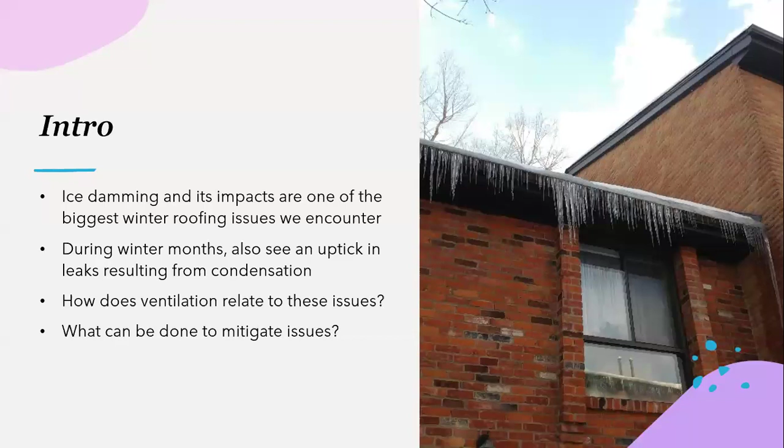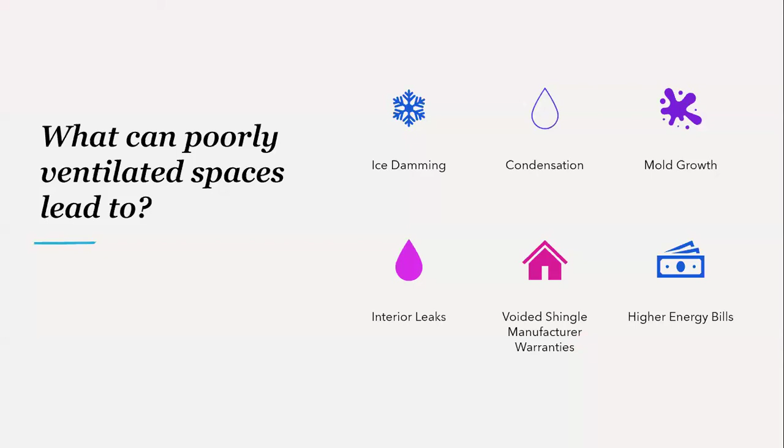So when it comes to ventilation, what can poorly ventilated spaces lead to? Well, as the title suggests, ice damming and condensation can be attributed to inadequate ventilation. Through these two issues, you can also see mold growth occurring, interior leaks, voided shingle manufacturer warranties, and higher energy bills for residents.

So especially with sloped roofs, whether there's shingles or another roof system in place, the attic is really important when it comes to ventilation and issues like ice damming and condensation. So especially in our climate, attics aren't accessed very often, or at least with people that we talk to. So I can see how they can kind of be out of sight, out of mind, but they do serve a very important purpose.

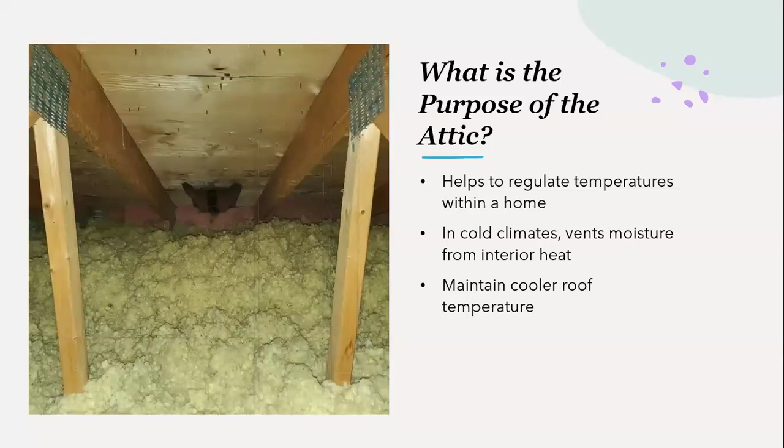Some of the key aspects of the attic do include helping to regulate temperatures within the home, keeping the conditioned space conditioned. Also, in our climate, again, with the cold winter months, it helps to vent interior warm, moist air out of the home and out of the roof surface. Also, it helps to maintain cooler roof temperatures.

So looking at what a normal, well-functioning attic should look like, a few key elements. Number one, you want to have a vapor barrier and insulation evenly distributed throughout the space to, again, keep any interior heat inside the occupied parts of the home.

As far as ventilation goes, you want to have at the lower end of the roof surface intake vents or soffits to allow cool air to come into the attic and then move through and out through the top surface, or the air outtake vents. So again, low venting for air intake and then vents on the upper and the high slope for air outtake. Neither of these vents should be connected to anything. It's strictly for airflow.

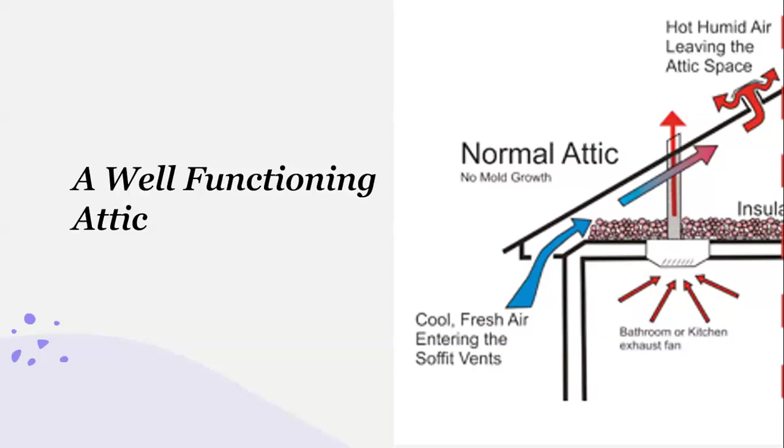Also, venting that's very important would be any interior connections to bathrooms, kitchen fans, laundry rooms. Any exhaust venting should be going up straight through the roof surface and venting outside of the home. So throughout the presentation, we are going to be taking a look at actual real-life examples in different attic spaces of when things are not functioning as intended and how that can lead to various issues.

But first, what do these attics have to do with ice damming, and what is ice damming? So ice damming is snow that melts and refreezes along the edge of the roof surface. And when it does this, it creates a dam, which then traps water behind it. Oftentimes with ice damming, we also see the presence of long icicles hanging from the gutters. So does this mean that anytime there's snowfall, there's an opportunity for ice damming to happen? Not necessarily. In just a second, we'll take a look at what the exact recipe for ice damming is.

But in the meantime, we're going to take a look at our first poll. So have you experienced ice damming this season? We'll leave this poll up for a few moments if you want to respond. Yeah, so this season, whether it's the beginning of this year or end of 2023, but in this winter season. Okay, if we want to share those results with everyone. We're just going to end the poll now.

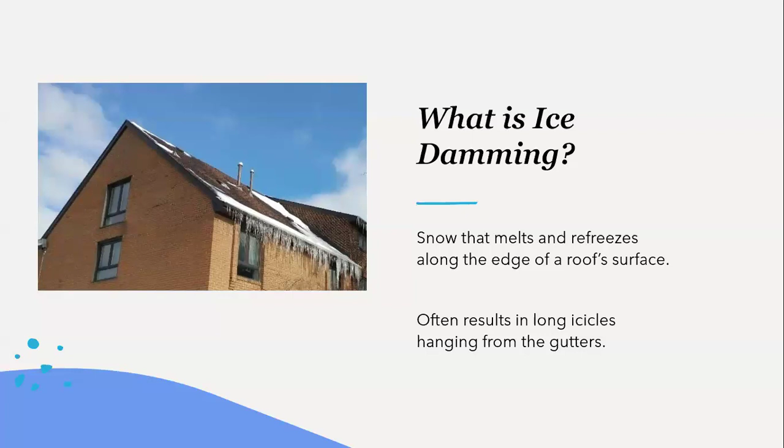Okay, so have you experienced ice damming this season? We have 19% saying yes, and 78% of respondents saying no. 3% are unsure. Okay, so not surprising that a lot of people have not seen any ice damming this year. I know we have people attending today from all over Ontario. So depending on what region you're in, you might have experienced more snowfall than other regions.

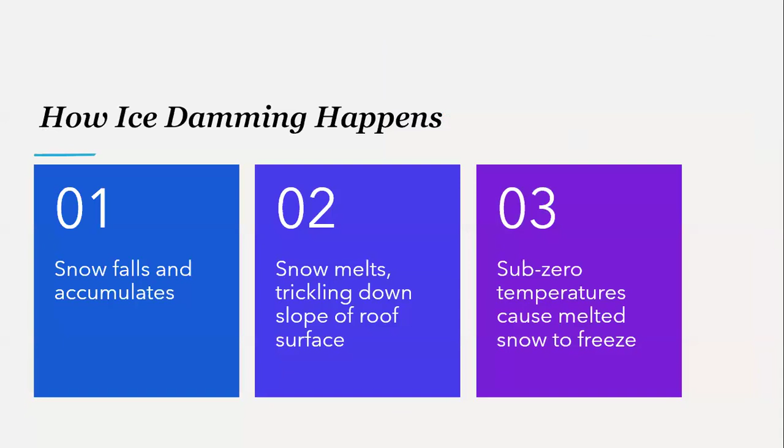So related to the second part here, the snow melting, this is commonly attributed to heat loss within the home and deficiencies within the attic. So if there are deficiencies in the attic making the space too warm, and again, going back to what some of those purposes of the attic space are, including regulating the roof temperatures. If it's too warm and you have the heat rising to the top surface, then the snow melts along the edge, freezing along the bottom if there are sub-zero temperatures following the snow accumulation.

This lower edge of the roof surface, where the soffits are and where the gutter system is, these areas aren't receiving any heat from the interior space, which is why that is where it would tend to have the ice buildup and potential for icicles.

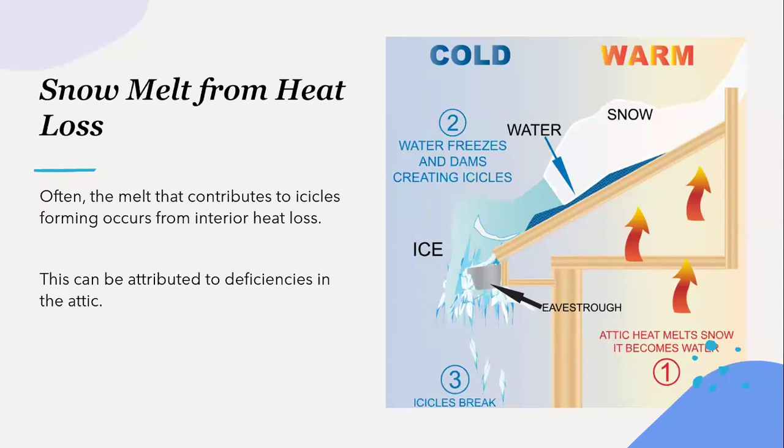So if ice damming is occurring, what's the harm in it? First and foremost, I think especially for managers, board members, residents, if you are experiencing ice damming, the first thought is, of course, going to be the possibility of icicles or large chunks of ice falling from the building. For the people that are living with this, it does pose a huge threat, and then liability for management or boards if something is not done about it. As far as the actual roof system or the gutters, it can cause damages to each of those areas as well. And on the next slide, we will look at an example of that. But there's also potential for things like mold growth or interior leaks related to ice damming.

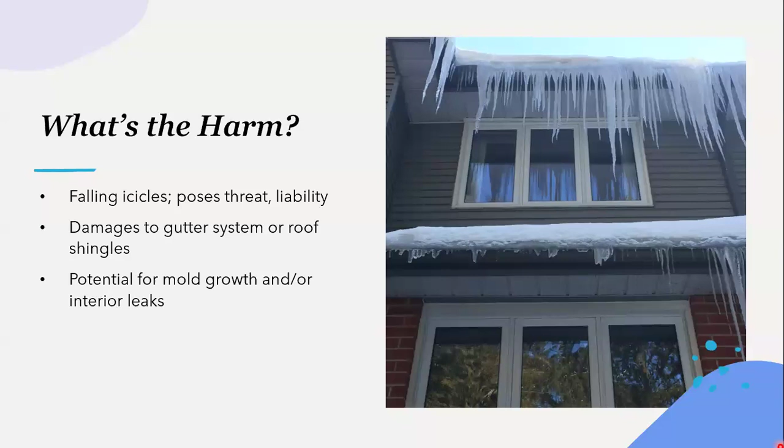So some of the common issues that we see, again, if there are large chunks of ice or icicles built up along the gutter system, there is potential for the actual gutters themselves to become detached or damaged because of the weight. Another thing that we see very often are damages to the lower shingles at the roof's edge, whether it's from the ice causing damages to the top surface, or something we see more often is the water backing up under the bottom layer of shingles, like it did in this example here.

So these two photos are from the same roof surface. And as you can see here, this was a newly replaced roof. If you were just taking a look at it, it looked to be in great condition, didn't seem to be any problems with it. However, when the ice damming was occurring, it was backing up at the bottom edge there and causing an interior leak.

Something to keep in mind, especially with new roof installations, is that you should always be getting 2 warranties. So the first warranty would be from the installing contractor that's going to cover any issues with installation or workmanship. The second warranty would be from the actual shingle manufacturer in the case that there are any defects with the actual materials and products used.

In a case like this, every shingle manufacturer warranty that I have ever read, and I've gone through a lot of them, explicitly states that any defects caused by ice damming or ventilation issues are not covered by the warranty. So just something to keep in mind.

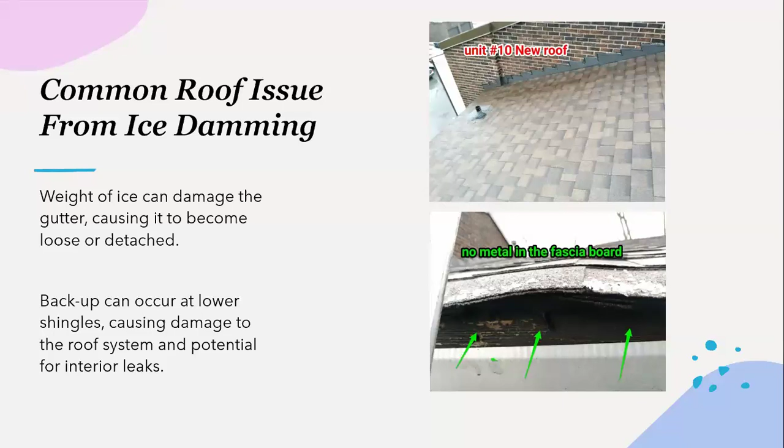That's all right. So no, absence of ice damming does not necessarily mean that your attic is well functioning and free of issues. You're still going to want to identify the root cause of your attic issues. Yeah, so as we pointed out a second ago, there are some issues that come to mind right away when ice damming is occurring or when you're thinking of ice damming. But it is important to keep in mind that, especially because attics are spaces that are not regularly accessed, there can be problems like mold growth or even wood rot that can affect the structural integrity of the roof surface that can be occurring whether or not you do see ice damming.

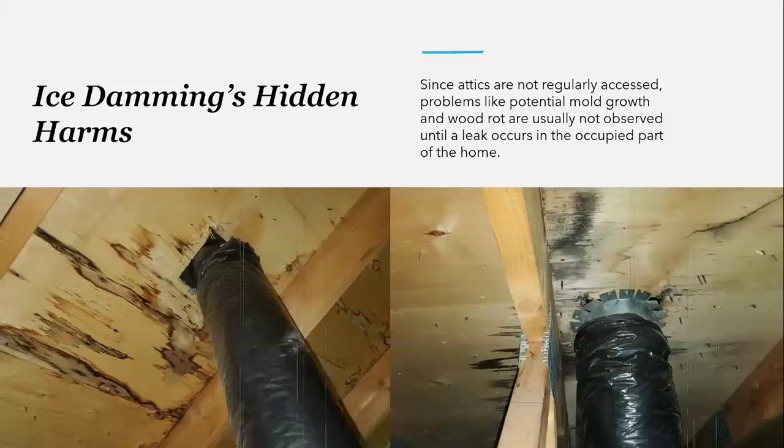For this reason, if you do have ice damming occurring, we understand the importance of having the icicles removed and removing any hazards that may be in place. But it's also important to identify the root of the issue, which we often say would start with an attic inspection and identifying any deficiencies in the attic space.

I think we have our final poll here also. Okay, perfect. Sorry, one sec. There we go. Sorry about that. So what steps should you take if you are experiencing ice damming? Okay, great. Thank you all for your participation. I see a couple more answers coming in, so I'll just give one sec. Okay, I'm going to end the poll now.

And I'll share those. So what steps should you take if you're experiencing ice damming? 1% says leave it, it will melt soon. 25% of you say remove the ice, and 89% investigate the cause. And in this case, we did do multiple choice because we do understand the importance of investigating the issue, but also wanting to have the ice removed so that it's not going to pose any threats.

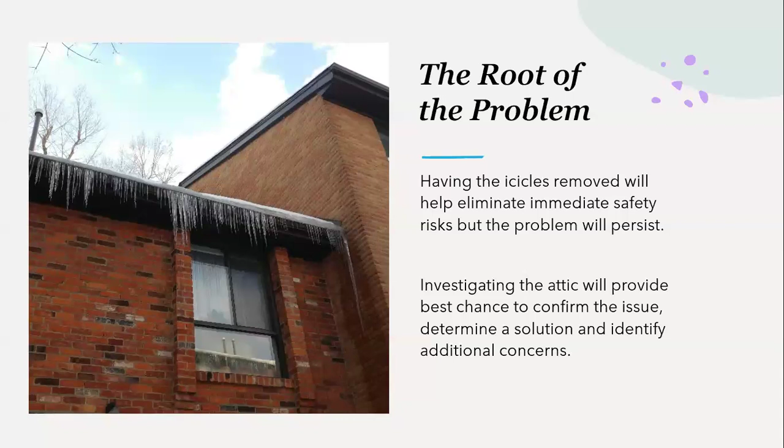So when it comes to identifying the root cause, again, we do recommend investigating the attic, and there is a long list of things to investigate just to make sure that all of the different elements of the attic are working together to promote adequate airflow and that everything is in place and functioning well. So as you can see, there's a long list of things to identify here, and we're going to be going through examples of each of them.

Michelle, what would you say of the list of things to identify in the attic would be the most important thing to look at? I wouldn't say one of them is more important than the other. I think they're all equally important. The attic is a very complicated space, and it's almost like its own ecosystem that balances off each other. So all of those elements are needed in order for it to function properly. You need the proper amount of air intake, proper amount of air outtake. You need vapor barriers to protect and seal. Every single one of those is very important, because if one of those is off, then the ecosystem will not work.

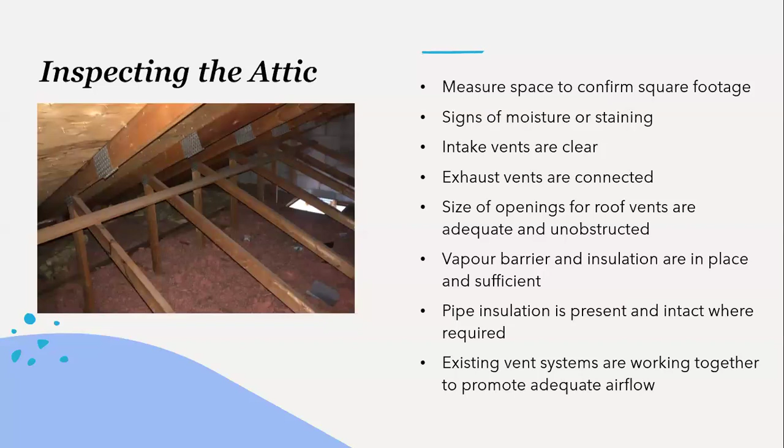One of the things that I'd say we see most commonly is that the insulation, especially if it's blown-in insulation, is blown right to the edge of the roof surface, blocking the soffits and the amount of air that's getting in. From time to time, we also have seen this where there are perforated soffits in place, but if you remove that soffit and look behind, there's plywood in place. Or we've seen situations where the style of soffit isn't perforated all the way through, so it's just not allowing enough of that cool air to enter the attic and displace any hot, warm air that's in place there.

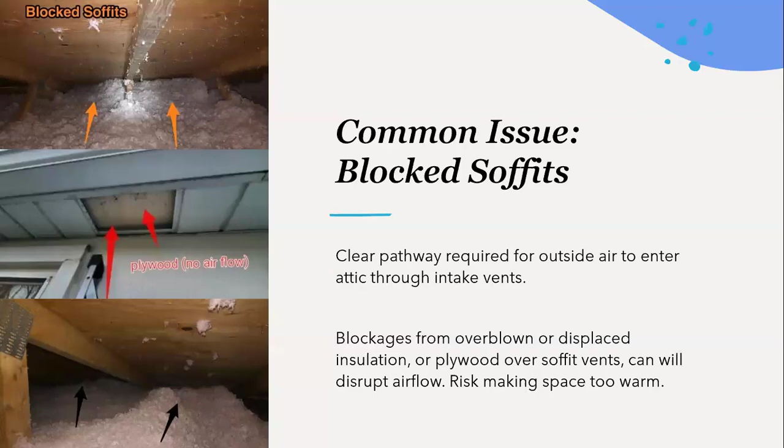This is likely the most common issue that we see in attics, and we see it in a lot of different ways. And that would be specific issues with the exhaust vent connections. So again, these exhaust vents are connected to places like bathrooms, kitchens, laundry rooms, areas where you want to have the fans on so that you're not creating any condensation from a hot shower or cooking or anything like that. So you don't want that built up inside a bathroom or a kitchen. You also don't want it built up in the attic.

So if we have issues with these vent connections, then what we see is that hot, moist air just pumping straight into the attic space. So again, we see it in a lot of different ways. Some of the things we see most commonly are situations like this where it's become detached for whatever reason. We see cases where it just wasn't installed properly in the first place. So in a case like this, it's not good enough to be close to the roof surface. It has to be properly connected and venting out through the top of the roof. Otherwise, you're going to get air leakage into the attic space.

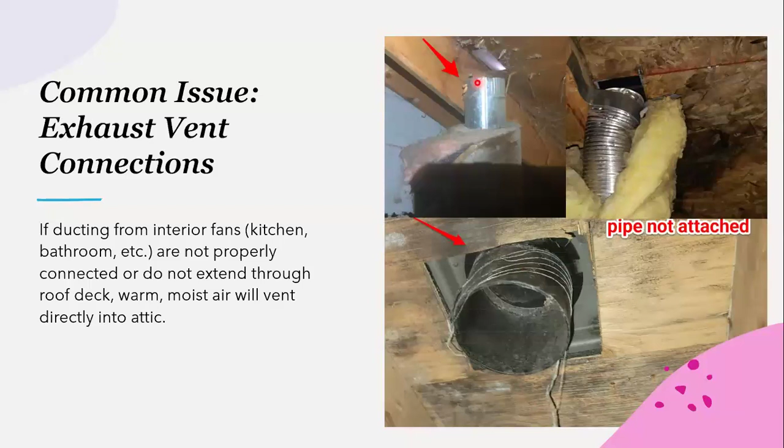Similar issue with the exhaust vents. Again, if they're not connected properly, that could be because they're not connected to compatible roof vents on the roof surface. For the air outtake vents especially, there are a few different types of vents. However, with the exhaust vents, it does have an interior connection to make sure that it is adequately sealed and you're not getting any of that air leakage. With any type of air outtake vent, it doesn't have that connection. So it's going to be like you see here, where even though it is right up to the plywood roof deck, there is area for air to escape and pump into the attic.

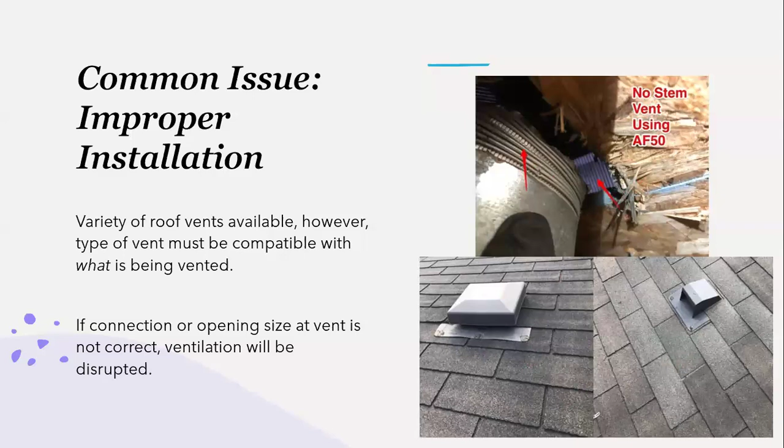This is something that we don't see very often, but we have seen before, and it's just too crazy not to include. So in this case, there was an active exhaust vent that was connected to the roof surface, but not connected to any sort of vent, and there was just plastic right over top of it. And then there was an opening nearby that was not in use. So again, that hot air didn't have an area to escape out of the top of the roof surface. You can see there's quite excessive staining happening through there. Some other issues in this attic as well due to improper installation.

When it comes to the air outtake vents, as we were just looking at, again, you want to make sure that they aren't connected to anything. Their purpose is just to make sure that there's space for any hot air in the attic to move out the top of the roof surface. The minimum requirement is that there should be 1 square foot of outtake ventilation per 300 square feet of attic space.

It's also very important, not only do you want to make sure that this isn't connected to anything like an exhaust vent, but you want to make sure that they are unobstructed and clear from anything, including roof joists. So in these cases here, it may not seem like a big deal because it's not covering it completely. But even in these cases where you have something blocking that space, it is impacting how much air can get out of that opening. So any areas where there is a joist in place or any other roofing element that may be obstructing it, you want to make sure that it is clear.

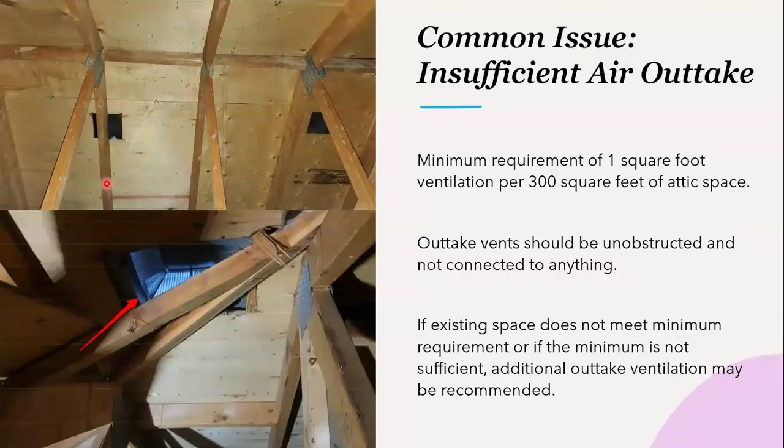Something that we see less often, but from time to time, are issues with the existing insulation. So that would be if it is extremely damaged, especially if there is a large leak issue occurring, or if it has become displaced or just wasn't installed in a particular area to begin with.

As far as, especially in a case like this, how does it get so displaced? Often in times like this, it could be because of pest infiltration and pest issues, or again, it just could be because of an error with the initial install. But the insulation and vapor barrier, again, it's very important to make sure that it is evenly and adequately distributed throughout the space so that you are keeping interior heat inside the home.

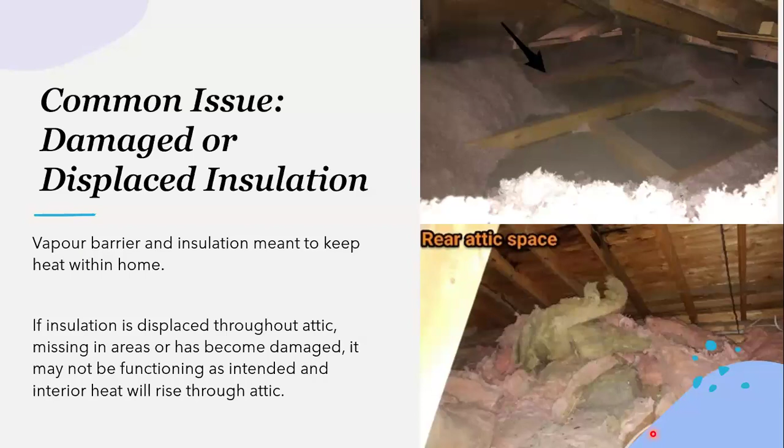So as far as coming to a solution, unfortunately, there's not a one-size-fits-all solution when it comes to ice damming or other attic deficiencies. It is going to be unique and dependent on the specific issues that are occurring in the particular attic space. There are some times where if there is a complex-wide ice damming issue or an attic issue that is present throughout, then there may be a similar solution for the entire complex. But just because you manage one site that had an ice damming issue and certain corrections were put in place and solved the issue, doesn't mean that it's necessarily going to work for another site.

Michelle, looking at some of the deficiencies that we looked at and some of the items to look for, there are checklists that we can go through when we're going through the attic. Would you recommend having a homeowner take a checklist and go through the attic to identify any potential deficiencies?

No, I would not. The attics are full of hazards, and unless you're properly trained on navigating your way through there, there's water mains, there's various other pipes, stuff like that. I would not recommend a homeowner doing that themselves. I would recommend hiring a contractor that specializes in attic ventilation. Make sure you ask them specifically if they understand attic ventilation systems and maybe ask for a bit more background information because not everybody is knowledgeable in how attics work.

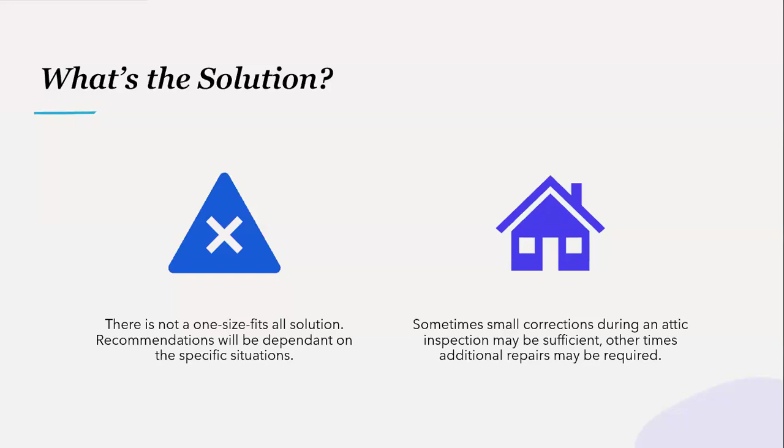So one of the things is with the air outtake vents. So if there's a case where the existing outtake vents are obstructed, or if there's just not enough to adequately ventilate the space, again, anytime that there is the minimum requirement, we usually do see the minimum requirement in place. However, I'm sure you know if there is a minimum requirement, it's very rare that people are doing more than that. So sometimes there just might be more outtake vents that are required to adequately ventilate the space.

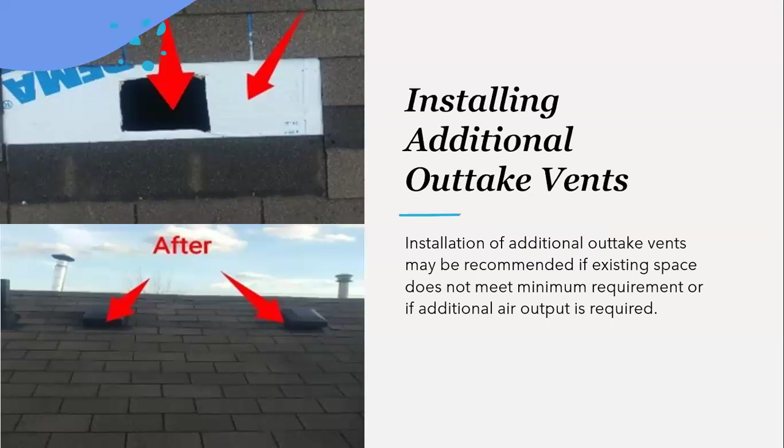When it comes to the air intake vents, especially in situations where the existing insulation is blown right to the edge of the attic space and is blocking the soffits, one of the options to help promote more outside air being able to get in would be to install baffles. So this just acts as a channel for air to pass through in the event that there is insulation blocking the airflow. In some cases, we actually see baffles that are already built into the space, so they can be made of wood and part of the structure.

And if they're not, then there are these foam baffles like we see here that can be easily installed, usually at the time of the inspection, just to allow more of that outside air to get into the attic space. As we see here, we don't come across this very often, but it is important to ensure that if you do have baffles in place, that there isn't insulation or any other items that are getting into the baffles, as that is going to defeat the purpose and you're not going to get that airflow coming through that channel.

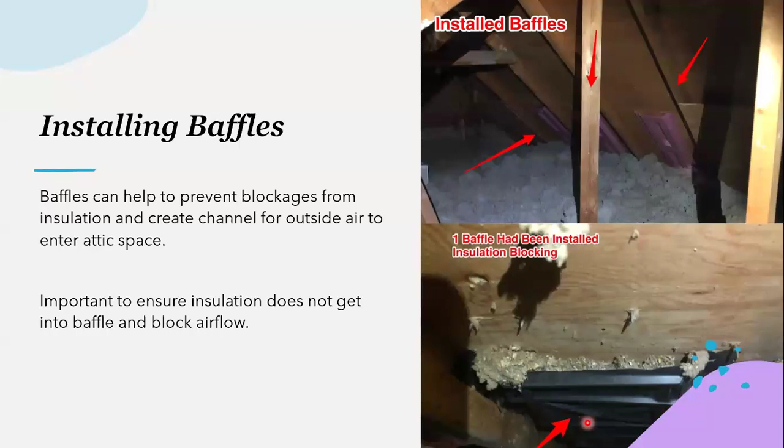So one of the options also, if there is an improper vent that is currently installed, or if the current vent is not working for whatever reason, then it may be an option to change the existing style of vent. So we have here 4 different examples of slope roof outtake vent options. Again, what we see most often is the AF50 box vent. We do have ridge vents, which we're seeing more and more often these days, the turbine vents and the box vents.

As far as what type is the best one or which one is better than the other, no real recommendation there. You just want to make sure that whatever outtake ventilation is in place is going to be adequate for the space and working with the other systems to make sure that any heat within the attic is getting out of the attic space.

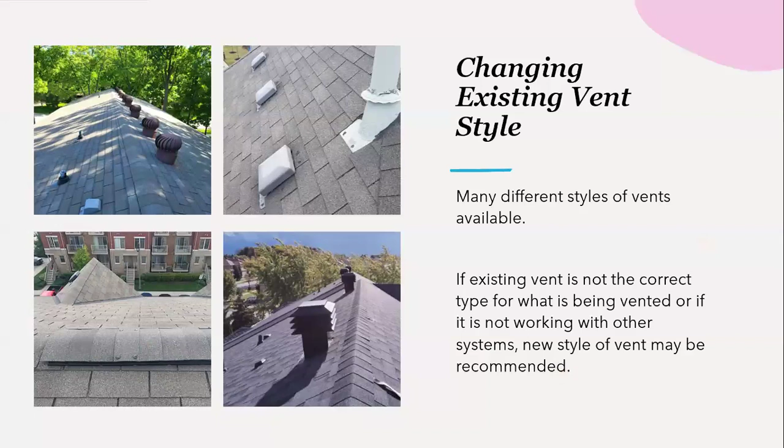In cases where the insulation or vapor barrier has become severely damaged or has been displaced or is missing from certain areas, then in that case, we might recommend installing new vapor barrier insulation, topping it up if needed, or replacing any damaged areas. So again, especially if there have been cases where there's pest infiltration or any damages like that, or if the pests have been living in there and there's any concerns about harms from them being in the space, replacing or renewing some of the vapor barrier insulation may be a step that can be taken.

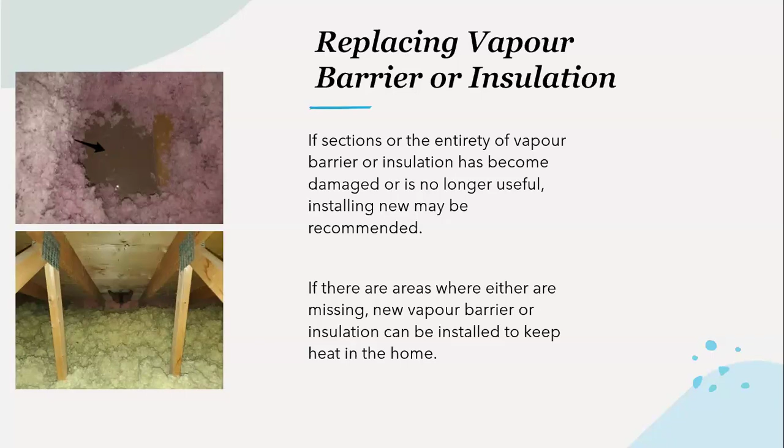So in just a second, we're going to take some of the questions that we've received that are specifically related to ice damming. But before doing that, we're going to go over some of the common questions that we've received over the years.

So the first one, will clearing the gutters prevent ice damming? The presence of gutter debris is not going to directly impact whether or not ice damming occurs. Removing debris from the gutters is a great thing to do, especially heading into the winter months. But that would just be to ensure that any drainage is going to drain adequately to the downspouts, and you're not going to have any issues with blockages or the leaves in there freezing. But any buildup of debris or foliage in the gutter system is not going to directly cause ice damming.

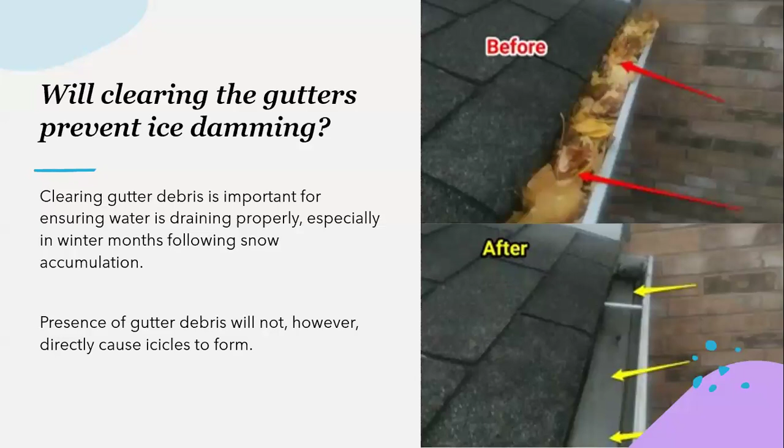As far as solutions for ice damming, I feel like this is one of the things that we get most commonly is about heat trace cables. And this is what a lot of people that we talk to tend to think is the one size fits all solution that is going to fix or solve any ice damming issues. When it comes to heat trace cables, they can be a useful tool to help mitigate any issues, especially the presence of large icicles forming. However, we would still recommend investigating the root of the issue.

There are times where there might not be a formal attic space or crawl space or large enough area to access to be able to mitigate any interior issues that are occurring. So sometimes heat trace cables are the most viable option to prevent the presence of ice damming. One thing that we would say is if you do have heat trace cables, there are a number of different types on the market. You can go pick up heat trace cables from Home Depot or get them from places that specialize in that type of cable, which would require an electrician, making sure that they are connected properly. And it is something that you want to be inspecting regularly and maintaining regularly just to make sure that they are functioning as intended and not posing any hazards.

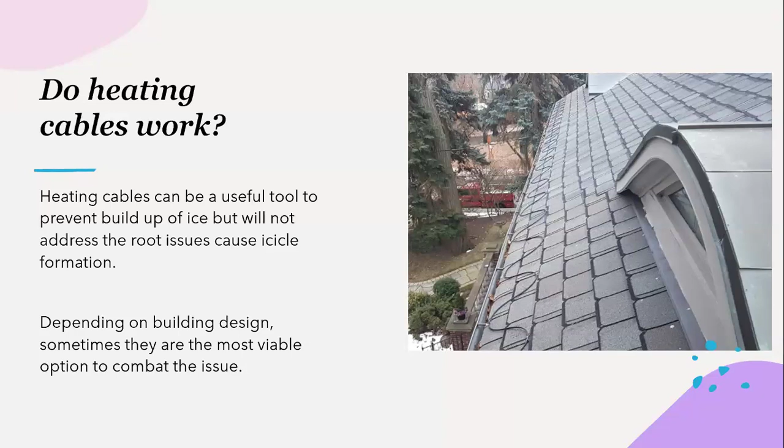As far as removing the icicles, how should they be removed? We do recommend having them safely removed and by a professional. It's very important to make sure that in the removal process, you're not going to cause any damage to the roof surface or to the gutter system by removing the ice. And you also want to make sure that you're not just standing underneath it, knocking it down, as that can cause harm in the actual removal process as well.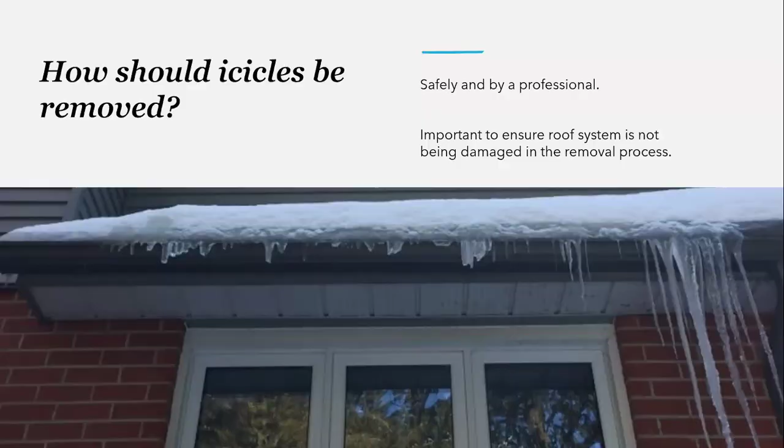Can ice damming occur on flat roofs? Although we do tend to see it more commonly on sloped roof surfaces because it allows the water to trickle down the slope of the roof surface, we do see ice damming on flat roofs as well. Contributing factors would be the same, and the recipe for ice damming would be the same. Sometimes in these cases, it can be a little harder to investigate, again, if there's no attic or crawl space, but especially in the cases of townhomes that do have some sort of area between the roof surface and the interior ceiling, there are items to investigate and be able to identify issues related to flat roof ice damming.

So Jess, if we want to take a couple questions before moving on to the next part. Yeah, okay. We have a lot of questions coming in, so I'll just pick a couple. So the picture you showed has a very long piece of ice. Is this because of the design of the roof? Kelly, do you want to speak to that photo? I believe that would have been the one towards the beginning. That's the one that had the longest one.

That one, I'm not sure. I don't think it would have anything to do with the design of the roof. I'm going to guess there was a long period of cold weather that built that up. It would really just depend on the ventilation and stuff in the attic. That's what Kelly mentioned.

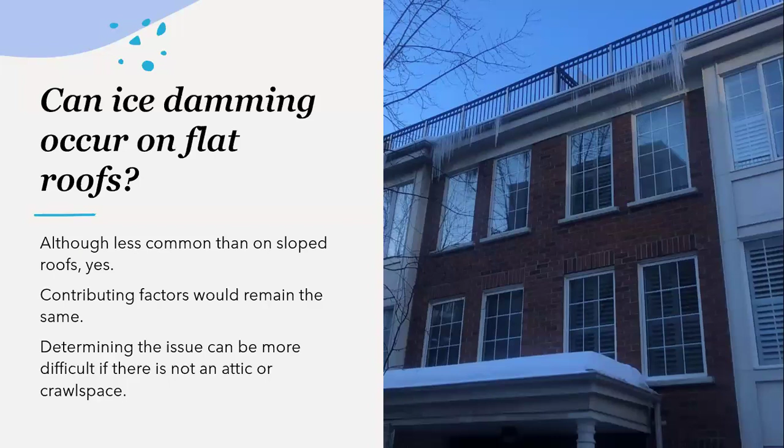So that's actually a great segue into our next point. We will have more questions definitely towards the end. We just wanted to see if there were any at this point before moving on to the next part of our presentation, which is on condensation.

So as Jessica just mentioned, just because there's not ice buildup and the presence of icicles doesn't mean that there aren't any issues occurring. Oftentimes we see this time of year that there are issues in the attic related to condensation, which can also lead to things like interior leaks and mold growth.

Especially in a winter like we've seen this year, we haven't really gotten a lot of heavy snowfall in most areas, and often the snowfall that we have gotten hasn't really been followed by those freezing cold days where the ice damming actually forms. So again, in the poll that we did at the beginning, the vast majority of people haven't seen any ice damming at properties they manage or just in general this year. And that's becoming more and more common with the more mild winters that we've been experiencing.

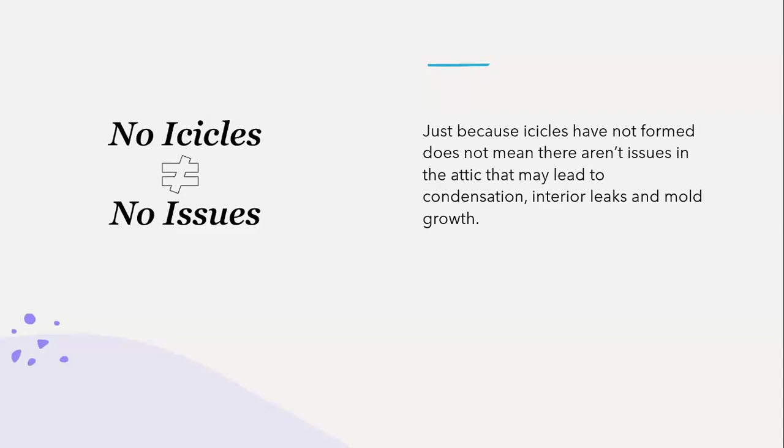So when it comes to condensation, I just want to make a quick note, we did receive some questions during the registration portion related to condensation. I just want to make it clear that the condensation issues that we are talking about today are related to roofing elements. So anything related to windows won't be addressed today. For that, we would recommend speaking to a window specialist. It's just not something that we can personally speak on.

So again, especially in the winter months where it's cold outside, warm inside, we do tend to see more leaks from condensation. In 2022, we broke down all the different leaks that we investigated and what the cause of all of the leaks were. Leaks from condensation specifically made up 4% of the overall leaks that we looked at. That might not seem like a very big number, but again, it is specific to the winter months, so a smaller portion of the year.

And a lot of the times when we see issues with condensation and leaks related to that, they do have a lot more damage, because oftentimes they're happening for a prolonged period of time before they're identified and investigated. In a lot of the cases of the leaks that we investigated in 2022, or even the ones that we've investigated this year, there was excessive condensation occurring and leaks occurring. However, there wasn't ice damming or any presence of ice buildup at the time of the investigation and the leaks.

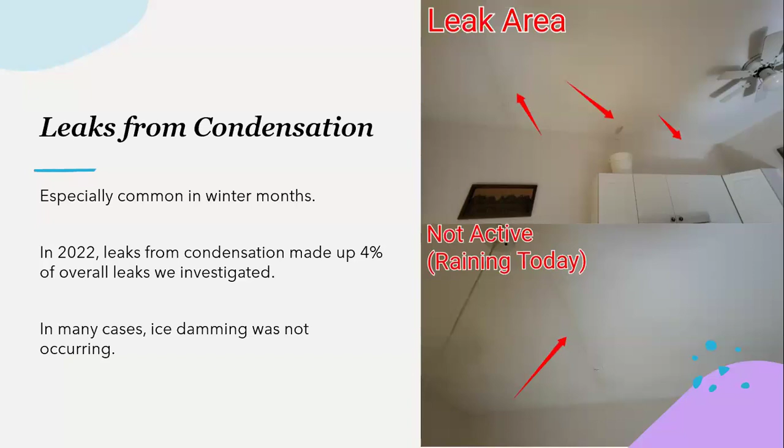So taking a look at one of the examples, this is actually something that we investigated, I believe it was just a few weeks ago. It was early in January of this year. So in this particular case, it might be kind of hard to see depending on what size screen you have, but there was a leak occurring in the closet where the access hatch to the attic space was, and there was just a small little stain on the side of the hatch there.

And then just as far as the design went, the ducting for the bathroom vent went across the whole attic space. So where the bathroom fan was in relation to the vent on the roof was opposite ends of the attic space.

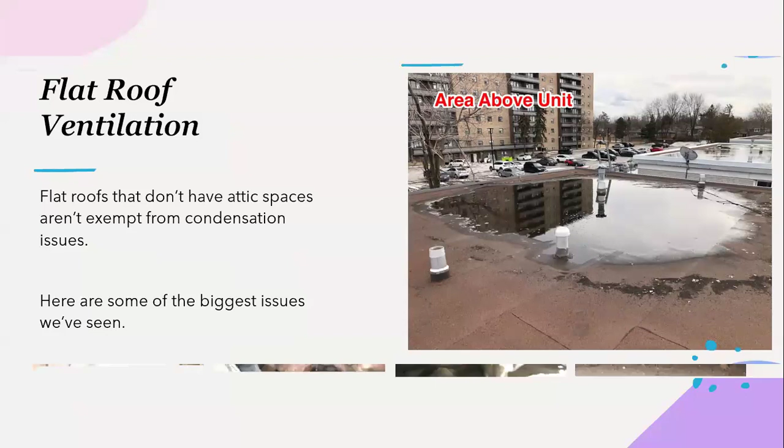So one of the things that we see from time to time, and this can be very tricky to identify, especially before it's become an active leak in the home. This is if the vents behind the ceiling have become disconnected or weren't installed properly in the first place. So in this particular case, there was a leak occurring that we were investigating.

And during the investigation process, we had cut the drywall and cut the ceiling just to see what was happening behind these spaces. In cutting the ceiling and the drywall, we did see super heavy black staining on the insulation behind, which was suspected mold growth. And then we did find an exhaust vent behind there that wasn't connected to anything, so just pumping hot air behind the ceiling.

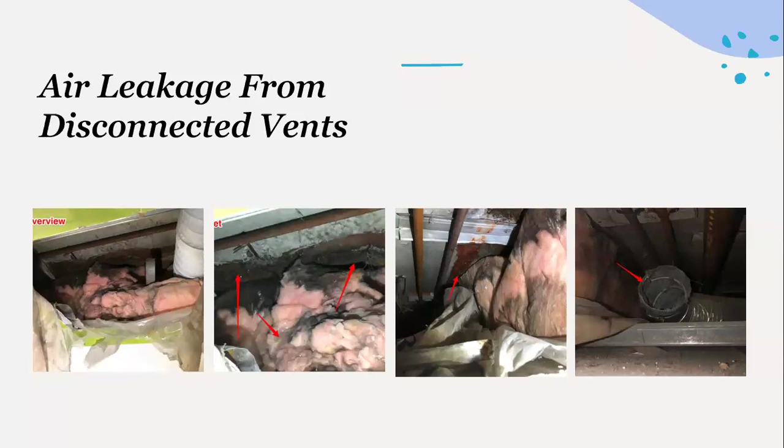One of the worst cases that we saw like this, where there was air leakage from a disconnected vent behind the ceiling, was in this particular case here. So there was a condensation issue that was occurring due to this vent disconnected behind the ceiling. However, it was not detected. So it got to the point that there was actually a collapse of the ceiling in the unit, and they ended up removing the ceiling throughout the majority of the first floor, and it was stained like you see in these photos all throughout the unit.

This had been occurring for likely a very long time. Huge hazard for the ceiling to be coming down like that, but also very extensive damages and remediation that were required because of this issue.

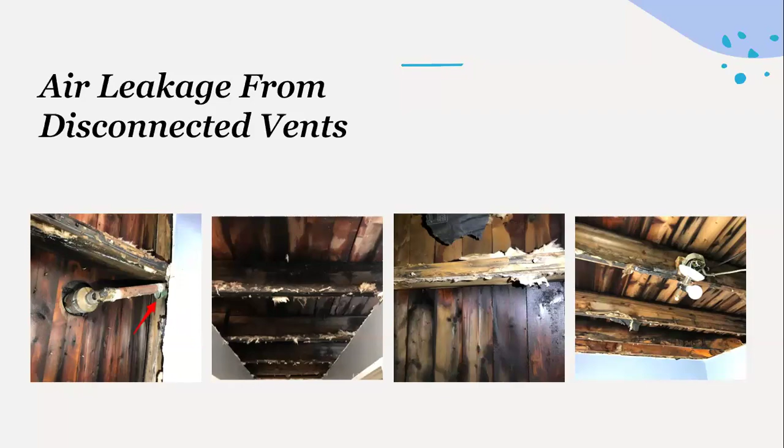So this one was something that we saw, again, a leak issue that was related to a bathroom. And this particular leak was only occurring when it was really cold outside. And there wasn't any active precipitation happening when the leak was occurring or in the days following. So those can sometimes be a sign of condensation issues. In this one, during the investigation process, there was some staining in the bathroom surface itself, some drywall separation. When we cut the ceiling here, there also was potential mold growth happening behind the ceiling.

We pulled a piece out, the pipe was completely corroded, and we ended up finding that below there was a disconnection here, which again was just allowing hot air to pump into this space, leading to prolonged condensation, which led to not only extensive damages with this vent in the interior connections, but also a leak into the bathroom below.

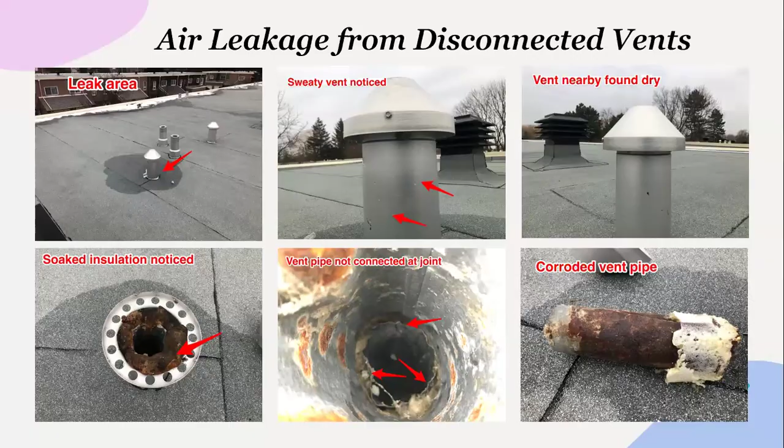When we were doing a leak investigation, we had access into one of the units, saw some of the staining that was happening inside. And then when we were doing the investigation on the roof, when we did a cut test of the roof, there wasn't any sign of moisture between the layers of the membrane itself. When we cut down a bit further into the roof deck, we did find that on the underside of the roof deck, there was, again, a lot of staining suspected to be mold, and then excessive staining in that area between the ceiling and the roof, just really heavy staining all throughout.

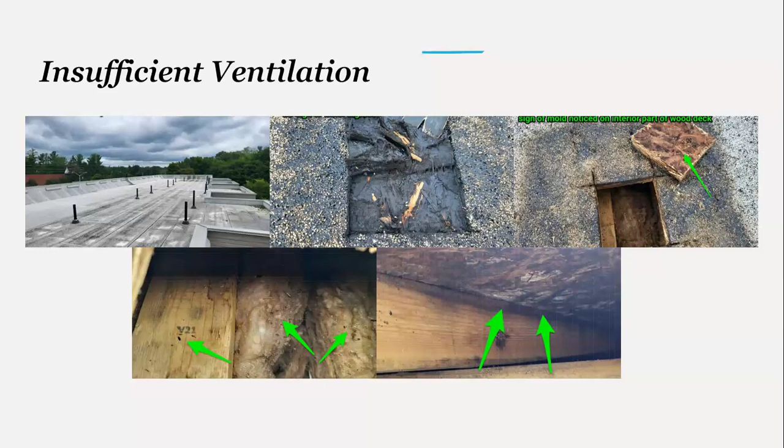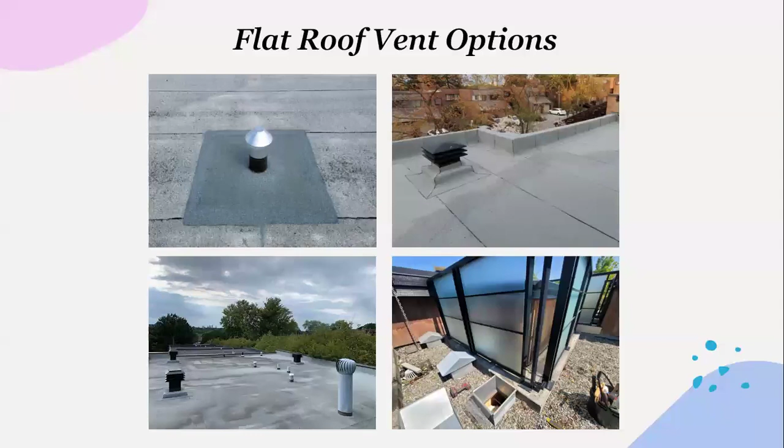And then just another thing to keep in mind that there can be condensation issues in small spaces like this, like an attic or the space between the ceiling, that aren't necessarily tied to the roof. So this is something that we saw a couple of years ago that was in a crawl space. It was causing a leak into the garage area next to this crawl space, as well into one of the adjacent units.

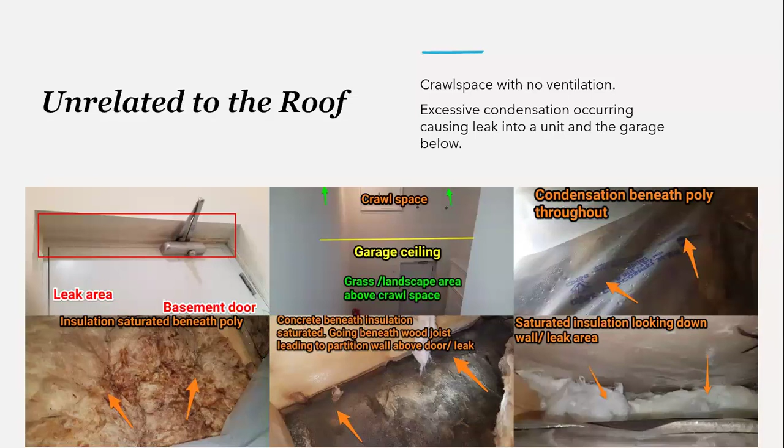So when it comes to detecting potential ventilation issues, especially if there isn't ice damming occurring, there's no foolproof way to identify these issues, but some of the tips that can be a little helpful and might be able to identify potential issues are the next two that we're going to look at. So the first tip would be completing a tissue test for any exhaust fans like those in the bathroom. So in this case, you would want to turn the fan on. Sometimes when you turn the fan on, it might sound like it's functioning because you hear it come on, it sounds like everything is good, but that's not always a sign that it is working as intended.

So a tissue test, holding two pieces of tissue paper up to the vent to make sure that it is sticking like we see here. If the vent is not holding it at all, or if it's only partially holding it, again, not foolproof. It could just be a sign that it needs to be cleaned, but it could also be a sign that there are issues with the connections in the attic. So if you have this happening, it might be a good first step to start looking at the attic space.

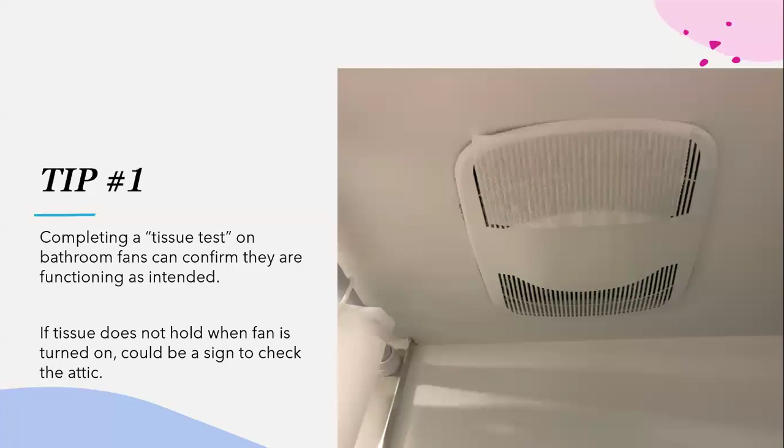The next one is related to snowfall. So again, if we have heavy snow accumulation, but in the days following it's not freezing, or it takes a couple of days for any ice to form, one tip we would say is to observe the total snow coverage on roof surfaces in the days following the snow accumulation.

If you have a complex where all of the roofs are completely covered right up to the peak with snow, and you have one that is only partially covered where the top is bare and there's snow built up at the bottom, even if there's no ice, this can be a sign that this is an attic that needs to be investigated, because if it was the temperature outside that was causing the snow to melt, it would likely be happening uniformly across the roof surfaces.

If there is a glaring difference between the snow coverage, it's very likely that it's attic deficiencies and too much heat in the attic that's causing the snow to melt, even if there's no ice in place.